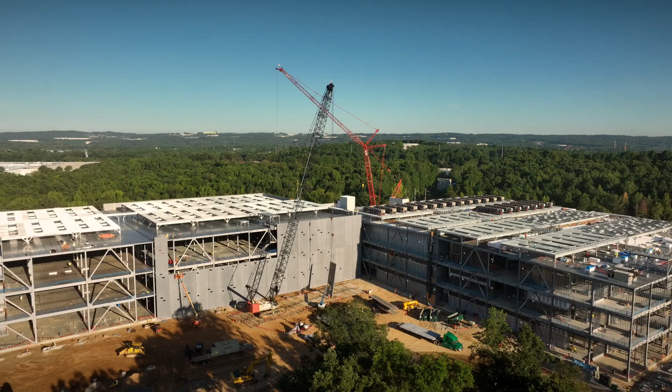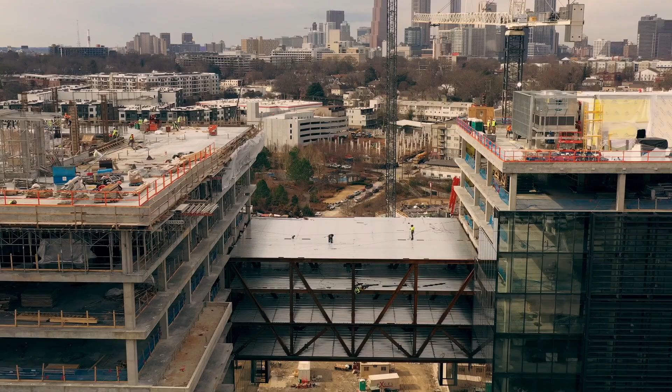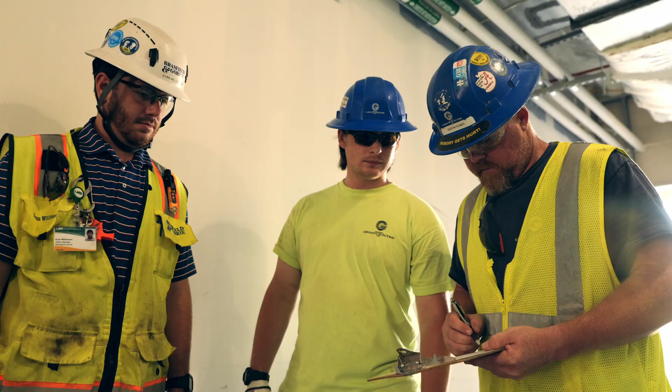We're excited you're here. Before we get started, we're going to share some information with you today about our safety culture and what all of us can do to get each other home safely. In this orientation, you'll hear about what drives our safety culture, the controls we put in place, and what you need to know to stay safe on our job sites. So pay close attention to what you hear and take it to heart, whether this is your first time in the field or your 50th.

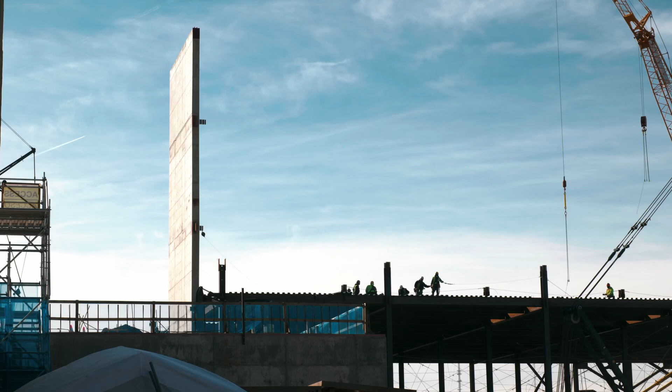At Brasfield & Gorrie, safety isn't just rules and regulations. It's a promise to you and your family. That's why we relentlessly pursue ways to strengthen our controls and empower our people. As we get started, we have some core beliefs that we want to share with you.

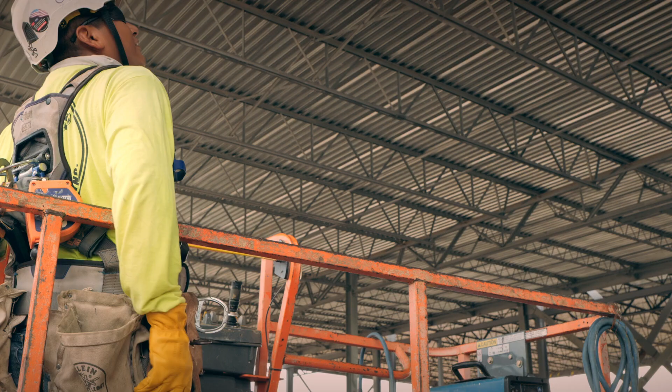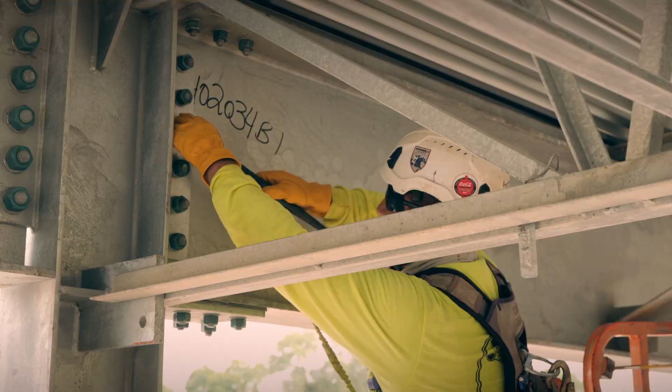People make mistakes. It's inevitable. You and I make mistakes every single day, but we refuse to allow those mistakes to end in a severe injury or death. To combat that risk, we have to account for human error in our everyday work.

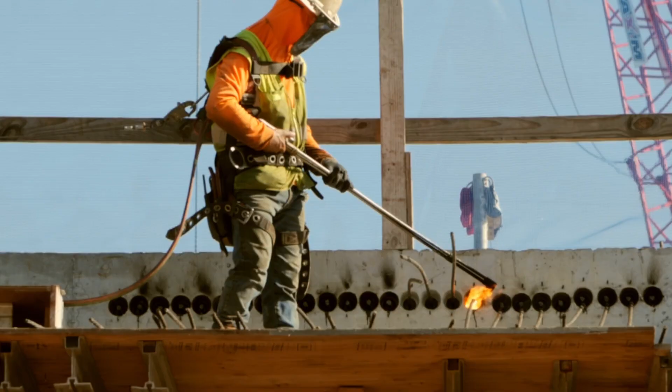Let's start with a hard truth. Construction projects aren't inherently safe. We have all the ingredients for something bad to happen every single day. Our people and our controls are what keep those hazardous energies from being released and hurting our teammates.

The 9 most dangerous of those energies are called stuff that can kill you, or STKY for short. These hazards have the highest risk of serious injury and even death. We're relentless about keeping controls in place, especially ones that combat STKY hazards. Let's explore each of these hazards and how we can protect against them.

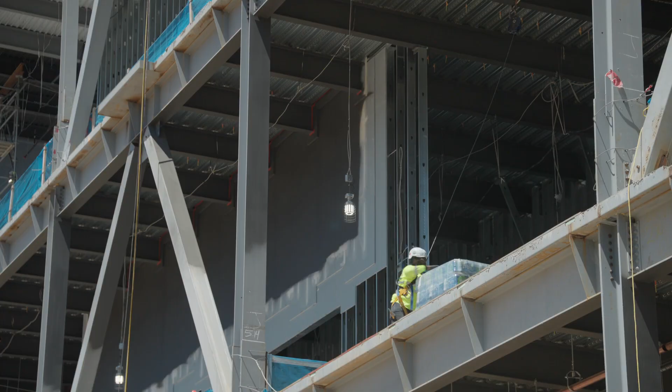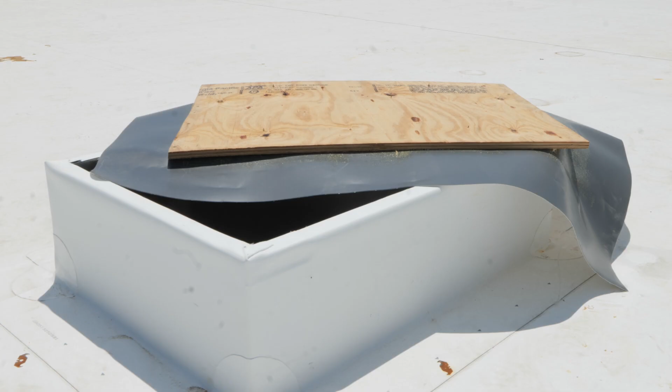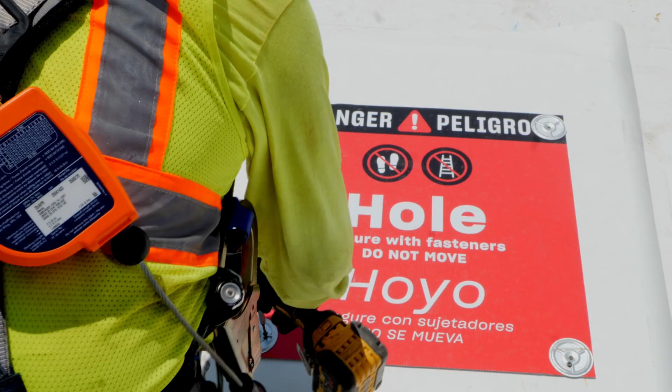Any task that puts you at risk of falling 6 feet or more requires fall protection. No exceptions. Some situations are obvious, protecting the edges of boom lifts and scissor lifts or easily reachable tie-off points. But other hazards, like holes in elevated slabs, aren't always as visible, and that's where mistakes happen. In those cases, we use the highest level of control, clearly labeled mechanically fastened hole covers. If the opening is large enough for a person to fall through, it must also be marked with warning signage.

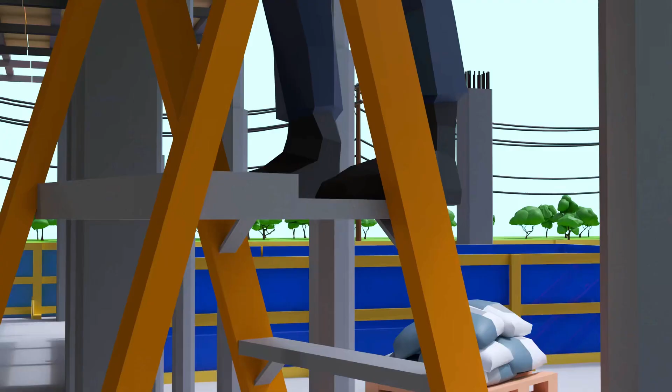For ladder work, only platform-style ladders are allowed. Traditional A-frame ladders present too many risks, including balance issues and misuse, and are no longer allowed on our job sites. If you're using personal fall arrest systems, such as a harness and lanyard, you must have a proper anchorage point rated for 5,000 pounds. Before you begin using that system, you also need to be trained on it and inspect your gear.

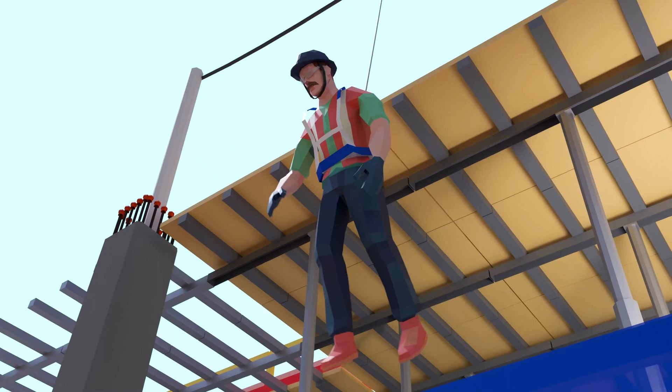Falls remain one of the leading causes of serious injuries and fatalities in construction. Take the time to plan, use the right equipment, and ask questions if you're unsure about anchorage points, access, or when to tie off.

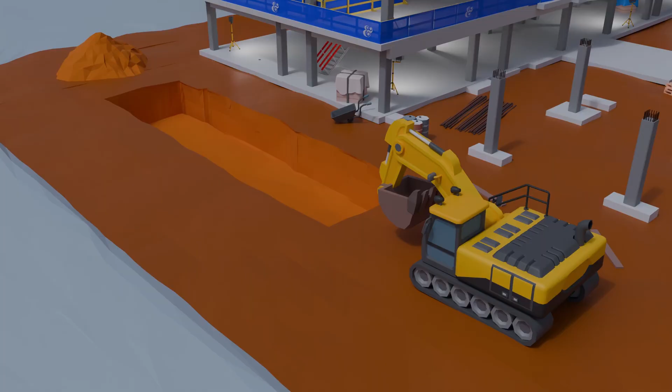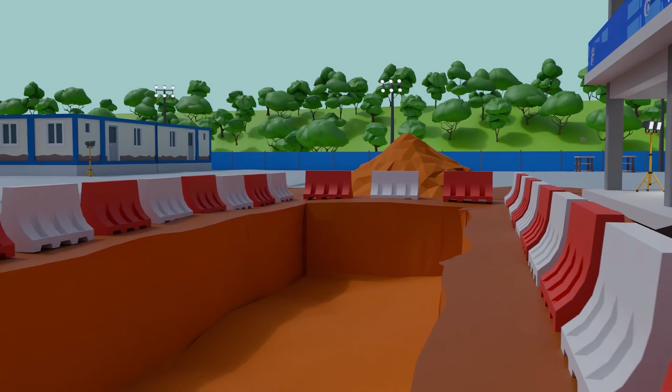Because soil conditions can vary and are hard to identify without testing, we treat all soil as Class C, the most unstable type, unless a third-party engineer tells us otherwise. That means we do not allow benching. All excavations 5 feet or deeper must be sloped at a 1.5 to 1 ratio, or about 34 degrees. When an excavation reaches 4 feet in depth, there must be safe access like a ladder or ramp within 25 feet of every worker. And let's be honest, safe access is the right move at any depth.

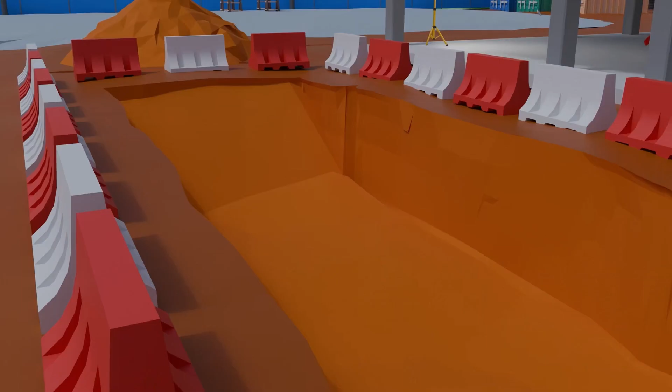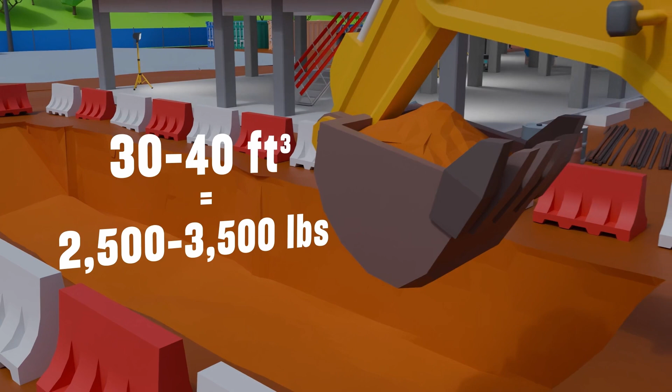If sloping isn't possible due to space or conditions, you must use a trench box or another approved shielding system to keep the walls stable and workers protected. Soil is heavier than it looks, around 85 pounds per cubic foot. A standard excavator bucket can hold 30 to 40 cubic feet, which means a single bucket of soil can weigh 2,500 to 3,500 pounds. That's more than enough to crush a person. And in a trench collapse, it's not just one bucket, it's the entire wall. Don't underestimate the hazard. Slope it, shore it, shield it, or stay out of it.

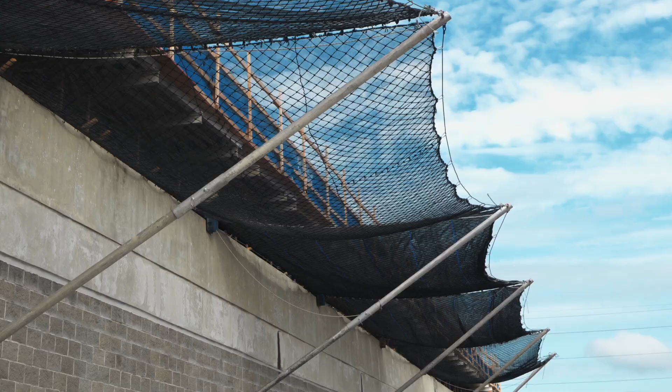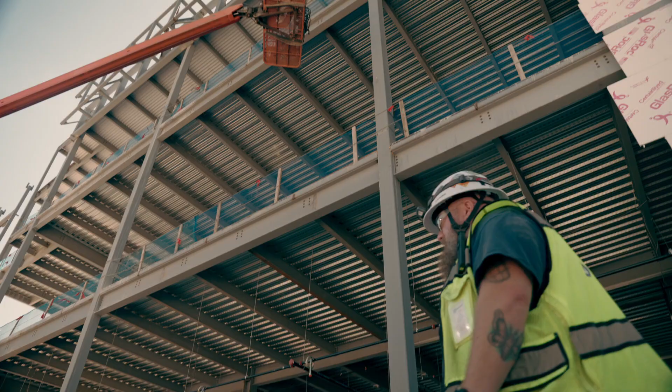No one ever plans to drop a tool or a piece of material, but when you're working at height, even a small object can become deadly. Tethering tools and materials can help, but it's not always easy or guaranteed to work. That's why we take falling object hazards seriously. Even one dropped object can cause life-changing injuries to someone below.

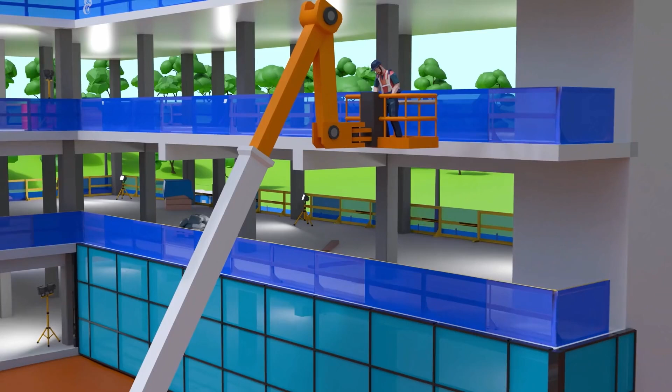A hard barricade must be installed beneath all overhead work. Red tape is not allowed. It's not strong enough, and it doesn't stop anyone from walking under overhead work. You'll see controls in place to reduce this risk, from netting on our guardrails, barricades around lifts and scaffolding, and rigid barriers under overhead activities.

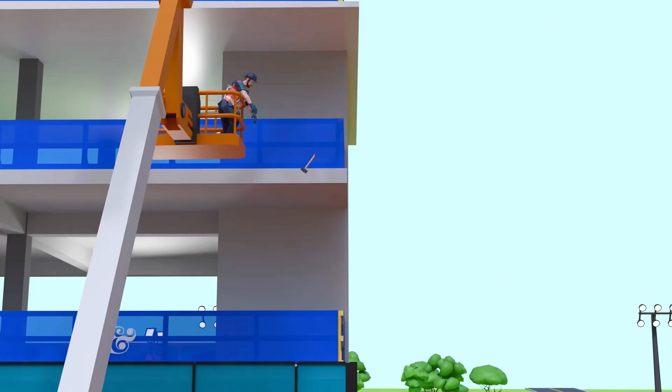Here's why it matters. A hammer dropped from 30 feet generates nearly 150 pounds of force when it hits the ground, more than enough to seriously injure or kill someone. Your job is not just to look up, it's to think ahead. If you plan your work and use the right controls every time, you can protect the people below you.

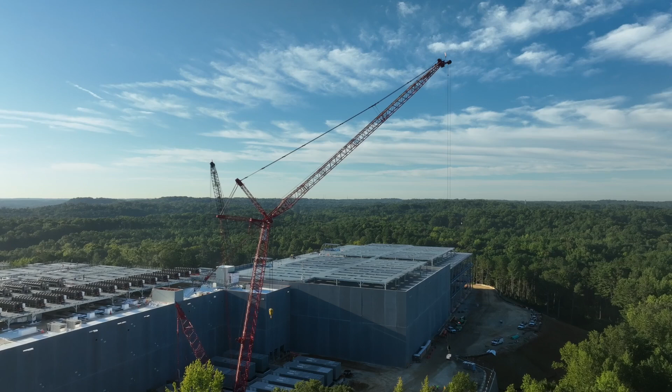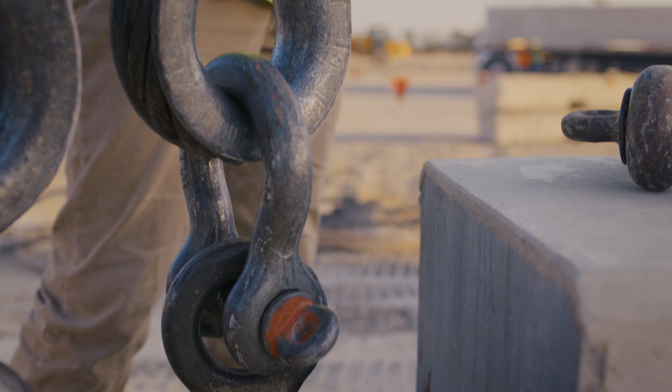Cranes and rigging are some of the most complex and high-risk operations on our projects. Because of the hazards involved, these tasks require proper training, close coordination, and strict inspections every time they're used. Every crane must be inspected daily, and those inspections must be documented and submitted to Brasfield & Gorrie. If you're involved in crane operations, this is non-negotiable.

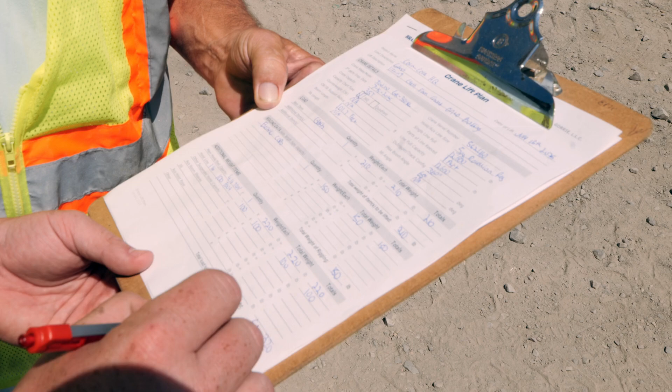If a lift approaches 75% of the crane's rated capacity, stop and notify project leadership. We'll review the plan with you, and if needed, develop a formal crane lift plan to ensure the pick can be done safely. Don't guess, we're here to help. Rigging also demands skill and attention to detail. Anyone rigging a load must have documented, up-to-date training on file with Brasfield & Gorrie.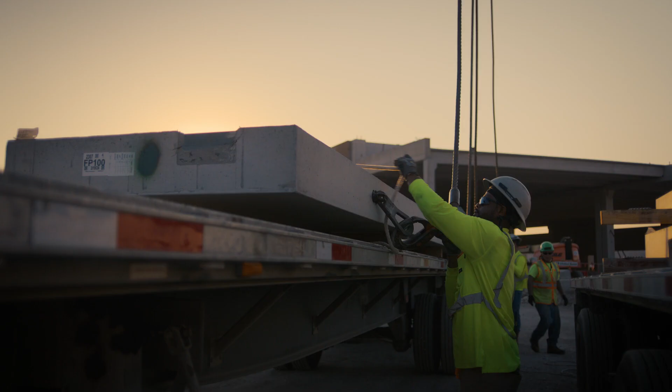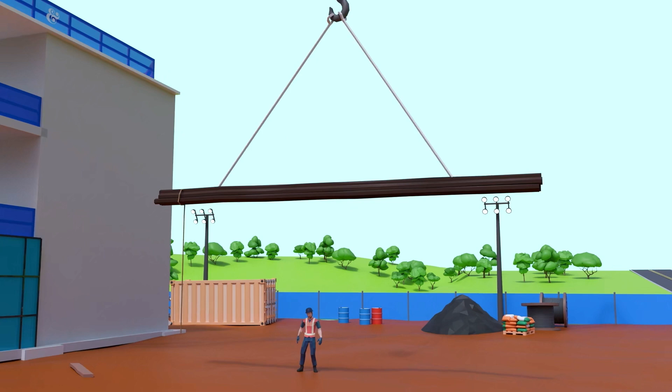Before every lift, perform a pre-use rigging inspection. Be ready to discuss your plan, including the hitch type and sling angle. Sling angles 30 degrees or less dramatically increase tension in the slings. If that tension isn't accounted for, the result can be a dropped load. There are no shortcuts for these operations. Inspect your gear, know your limits, and speak up if something feels off. Our team is here to support you every step of the way.

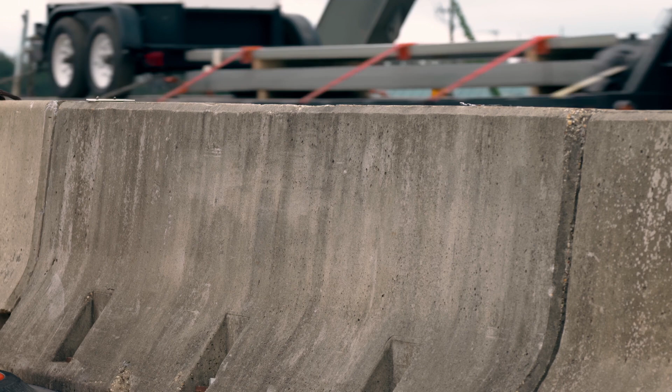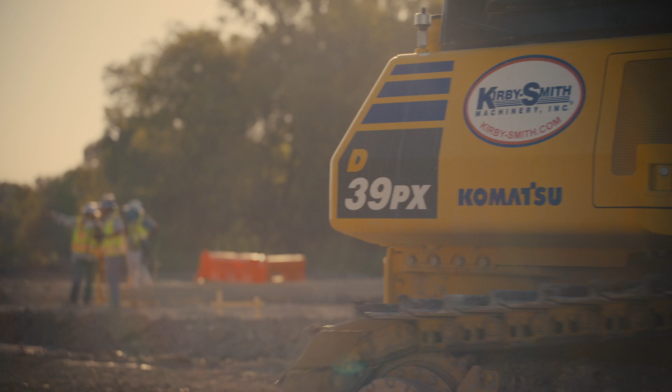Struck-by injuries are one of the most serious risks on our projects. While they can happen in many ways, we focus on the two most common: workers on foot struck by heavy equipment and workers hit by public traffic in or near roadways. Operating heavy equipment is repetitive, high-focus work. Operators face limited sight lines, blind spots, and sudden obstacles. That's why our first priority is creating separation using clearly marked walk paths, hard barricades, and flagging wherever possible.

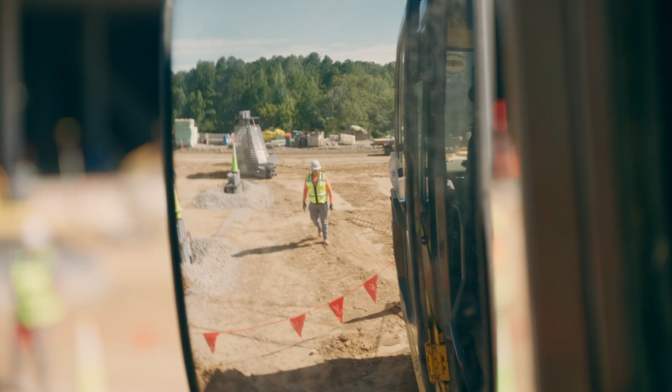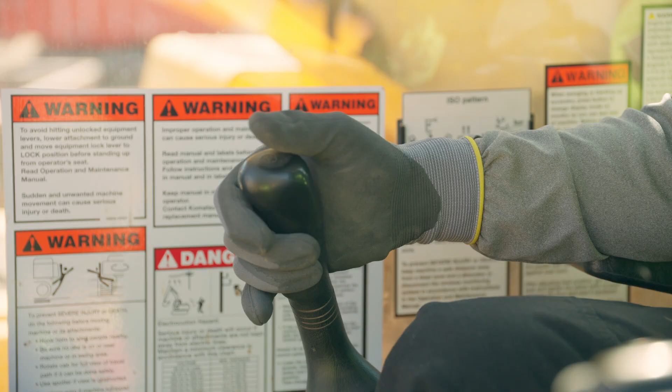When separation isn't possible, communication becomes critical. Make eye contact, use hand signals, and confirm you've been seen. If you're not seen, you're not safe. Operators play a role too: slowing down, using horns in blind zones, and keeping cab windows open to improve awareness. For equipment like excavators, swing paths must be barricaded just like open trenches.

Near live traffic, the risk of struck-by injuries increases. Public drivers are often distracted by signage, road changes, or their phones, so we require hard barriers like jersey walls or yodocks between you and traffic. We try to separate you from heavy equipment and public traffic where possible. When crossing public roads, follow designated crosswalks and always assume drivers don't see you. Our goal is simple. If a driver makes a mistake, it doesn't become a tragedy.

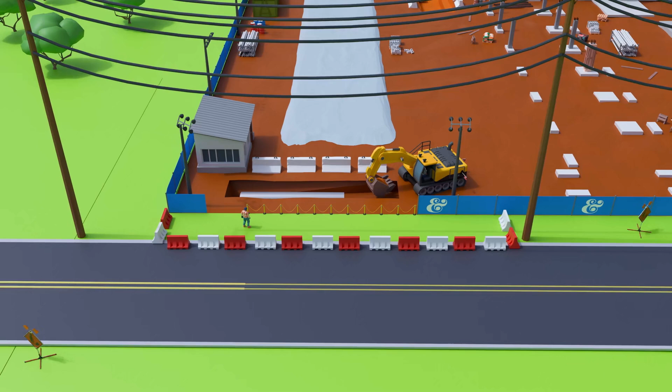Daily inspections, traffic control plans, and ongoing training help ensure our teams stay protected when working near the public. Struck-by hazards don't announce themselves. Stay alert, stay separated, and speak up.

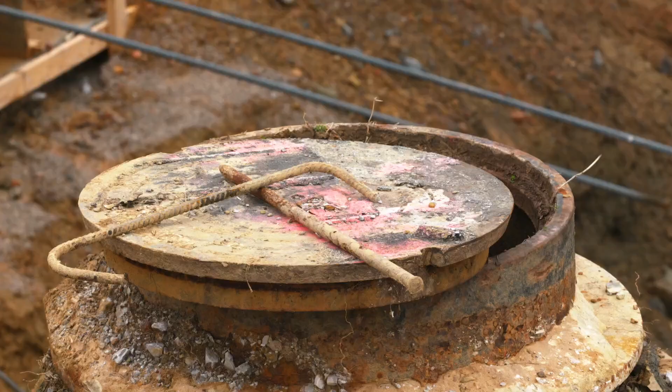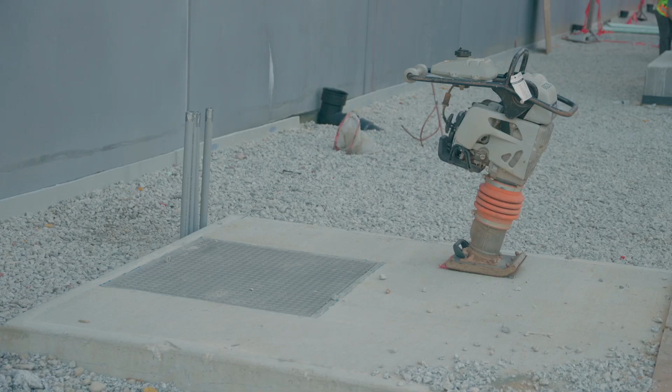Confined spaces are everywhere on construction sites, often hidden in plain sight. Manholes, vaults, tanks, crawl spaces, they all share a common risk: limited access, poor ventilation, and potential exposure to deadly gases. All confined spaces on site are classified into two categories by Brasfield & Gorrie: permit-required confined spaces and non-permit confined spaces. Each confined space will be labeled as to what category it falls into.

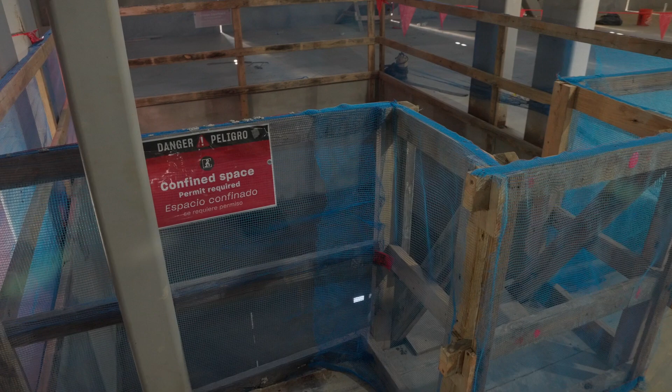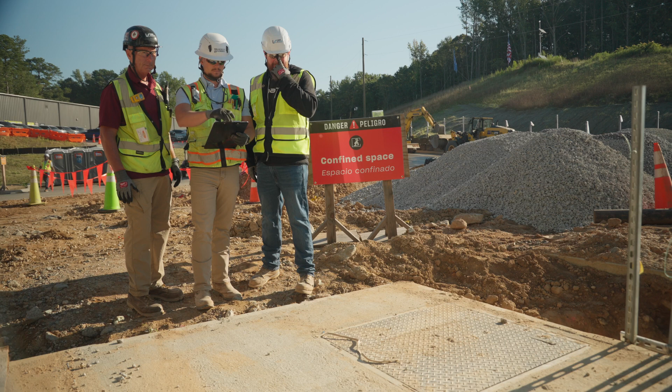All non-permit required confined spaces will be air monitored at a minimum of once per day. For permit-required confined spaces, a confined space entry permit must be completed daily and signed off by Brasfield & Gorrie prior to entry. Our project team will share which spaces on this project are confined spaces and which category they fall into. Atmospheric testing is a critical control in all confined space entries. Certain construction activities, ground contaminants, or nearby utility leaks can create conditions that have the potential to be fatal or life-altering. Most of these conditions can't be detected by eye or smell alone.

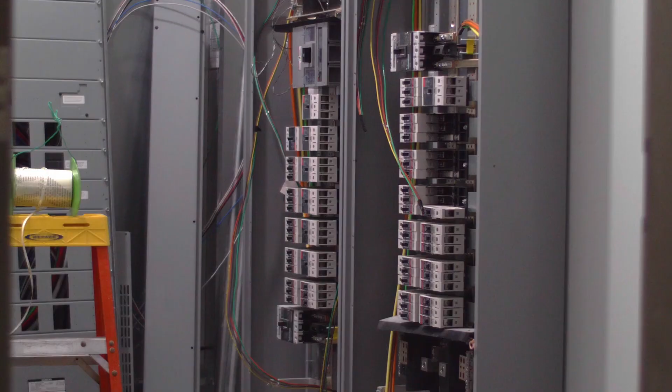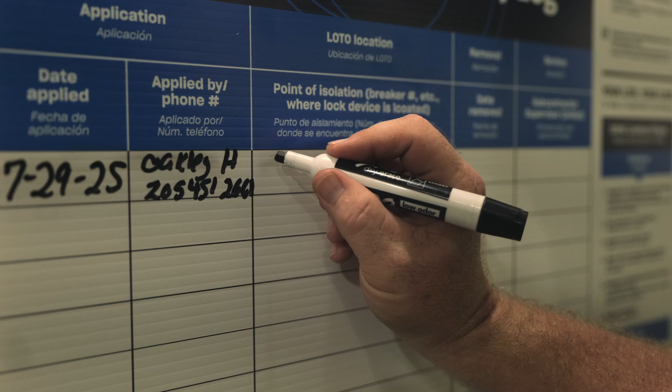Each year, we experience several near misses involving electrical energy that are either unplanned for by the workers performing electrical work or that went unrecognized. Before you conduct any work on lines or equipment that is energized or that could be energized, document your plan on the lockout tagout board. Then use the lockout tagout permit to walk through every step. Identify the circuit, verify it's the right one using the drawings, including red lines, as-builts, or panel schedules, and make sure you're not guessing. When it's time to lock and tag, make it obvious and make it secure.

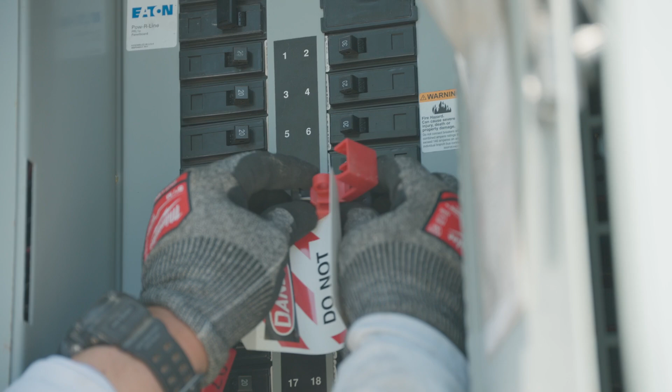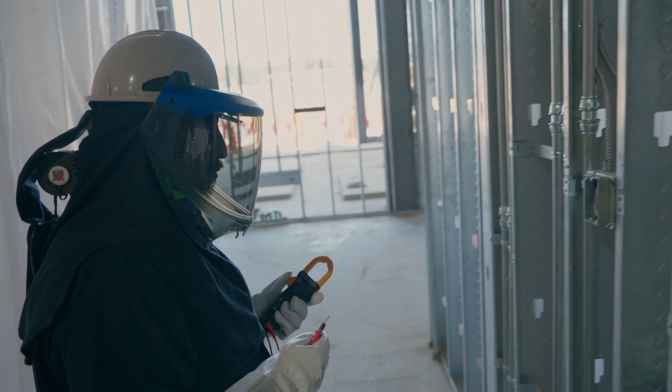That lock is your life insurance. And before you touch a conductor, always perform a live-dead-live test with a voltage meter. That's how you confirm that circuit was de-energized and that your meter is working. Any live parts that have the potential to be energized require isolation, such as with a cover or boundary to prevent accidental contact. Only authorized employees should be putting hands on anything that could be energized.

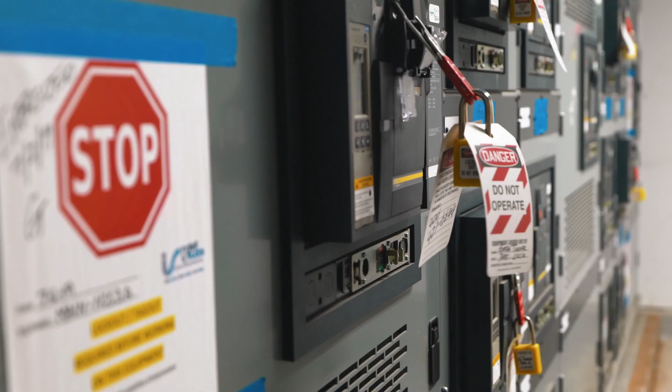Every year, we see incidents where someone skips a single step and gets shocked. Don't let that be your story. Take the time, follow the process, and stay in control.

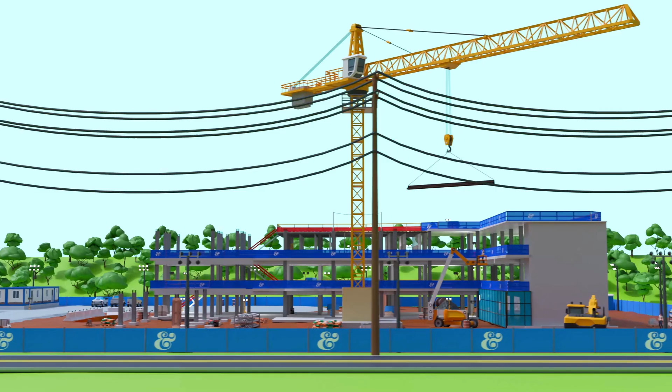On our projects, there are live utilities both overhead and underground that remain active through multiple phases of work. The best way to prevent utility strikes is visibility. That means clearly identifying and marking all utilities, whether they're in the air or under your feet. If you're installing utilities, it's your responsibility to communicate their exact location to Brasfield and Gorrie so we can update our site-wide utility map. Before any digging or excavation begins, you must notify Brasfield and Gorrie leadership and complete a dig permit.

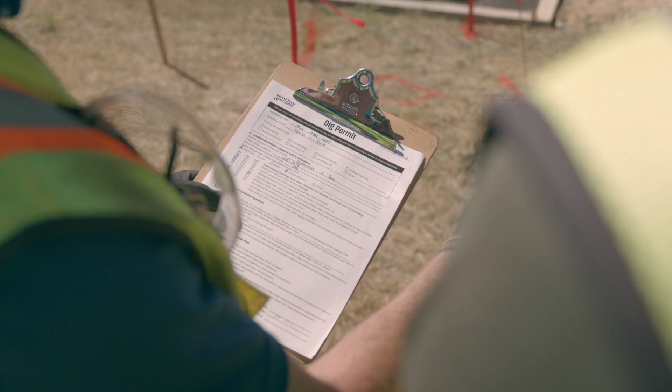The permit isn't just paperwork, it's a conversation. It ensures that both the equipment operator and the competent person understand exactly where existing utilities are. That information is available on our dig board, which is updated in real time. If you're working within 18 inches of a known utility, soft digging is mandatory. Soft digging is hand digging or using a vacuum truck to expose the utility safely.

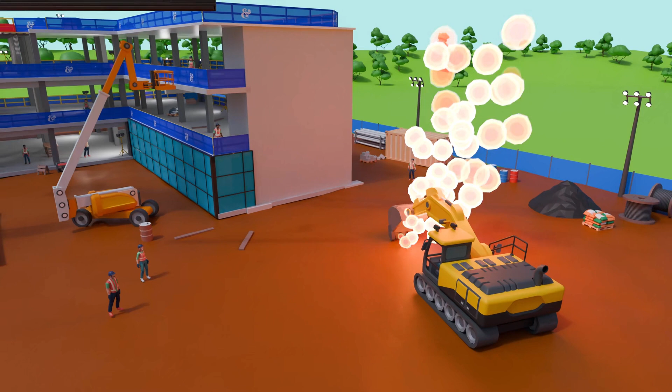Every marked line protects someone's life. Respect the markings, follow the process, and ensure controls are in place. You don't drive blind. We don't want you to dig blind either.

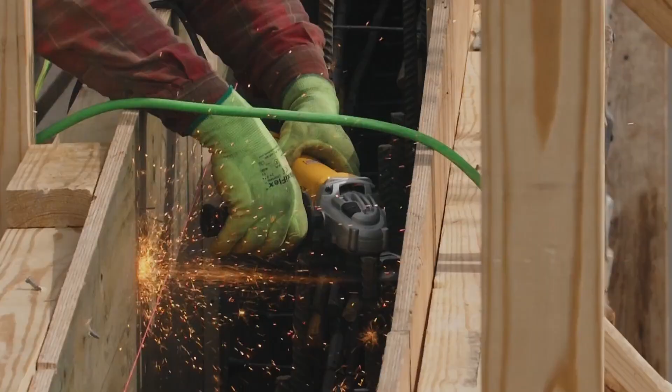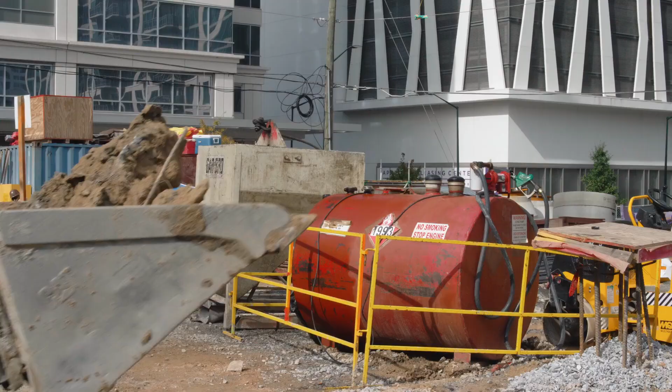Fire is the final STKY hazard we'll cover with you. While rare, fires on our projects can turn deadly in seconds. Hot work like burning or welding happens across our projects every day. When controlled, it's low risk, but around the wrong materials or when smoldering goes unnoticed, the results can be catastrophic. That's why we have strict expectations for fire safety.

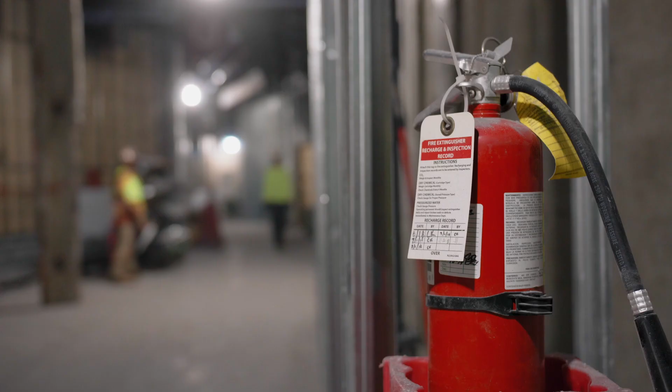Before any hot work begins, a Brasfield and Gorrie burn permit is required. One of our superintendents will review the scope with you and issue the permit on site. If you're doing hot work, you also need a dedicated fire watch who's clearly identified with a fire watch band on their hard hat. Their only job is to monitor the area with a fire extinguisher during the work and for 30 minutes after to make sure nothing ignites.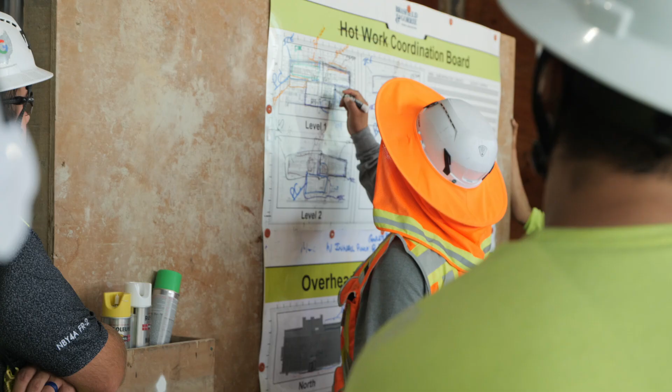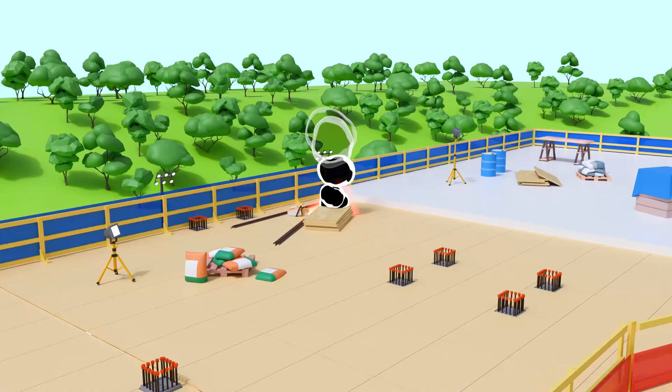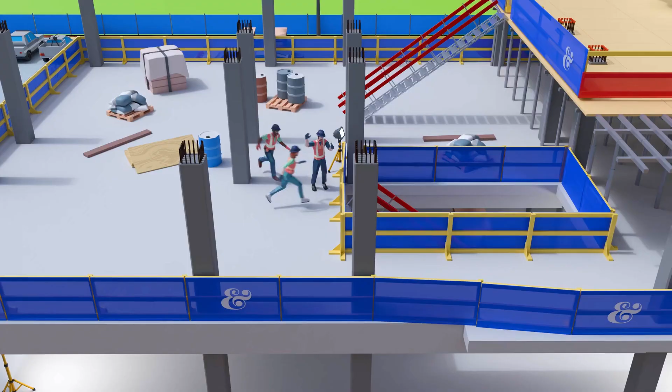Yes, moving materials or using fire blankets can take a little more time, but our team is here to help. Ask us. We'll assist. Small inconveniences are better than massive losses. In the event of a fire, your ability to evacuate quickly and safely matters the most. We've seen real incidents where having clear stair access and a practiced escape route saved lives. Let's work together, communicate, follow the plan, and take fire prevention seriously. It might just save someone's life.

We've shared a lot of info with you, but you might still have some questions. Now you'll hear from one of our project leaders who will walk you through some site-specific hazards, our emergency action plan, and how to get some of the permits required to work on this project. Don't be afraid to ask questions. If you have one, chances are someone else does too.

Now let me be clear about one thing. We take safety seriously. It's not just the responsibility of your supervisor or safety manager, it belongs to all of us. That means paying attention to hazards and speaking up when something doesn't look right.

Mental health matters too. If you're struggling, don't keep it to yourself. Talk to someone. And if you feel stuck and don't know who to talk to, there's a number you can call or text, 988. It's not just for emergencies. It connects you to real people 24/7 who are trained to listen and help you figure out your next step.

You can also call or text my personal phone anytime. I keep it on me 24 hours a day. My number is 205-789-7048. I'm going to ask our superintendent or safety manager to give you their number as well. There should never be a barrier to reporting an injury or raising a concern.

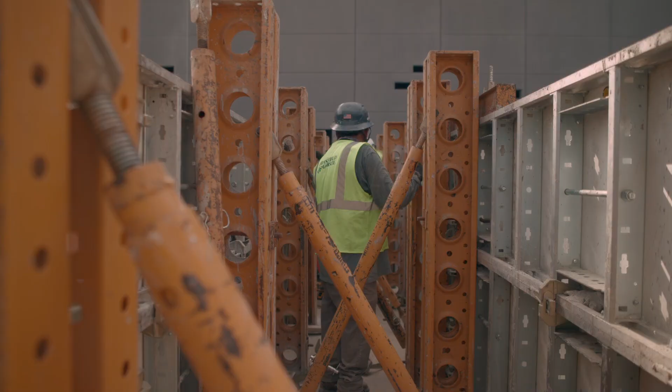We don't expect perfection, but we do believe that no one should lose their life over a mistake on the job. That's why we ask you to work with us as partners to keep this site safe. So be vigilant, watch out for each other, and speak up if something seems off. Welcome to the team.